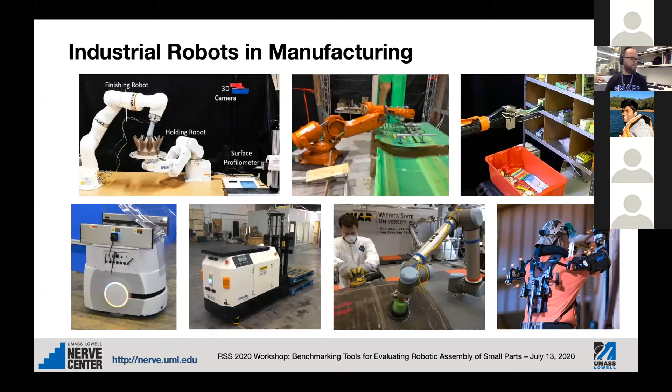Regardless of the type of industrial robot used in manufacturing, there comes down to some core metrics that people looking to adopt and deploy systems are really looking for. Those are metrics related to performance, efficiency, and productivity. There's also other metrics important for these systems related to how much they cost and their return on investment, but we're going to be focusing strictly on performance evaluation for this talk.

There's a lot of different metrics that fall into each of these categories, where for the performance of a system, you may need to match a certain spec for certain accuracy measurements of a robot arm, or a certain quality of grinding you need to reach for a certain application.

For efficiency, it's all related to the amount of time it takes for things to be redeployed for different tasks, or ratios of time spent in one part of the process versus another. Those two combined can be used towards productivity measures - ultimately throughput rates, defect rates, things that are going to affect your output.

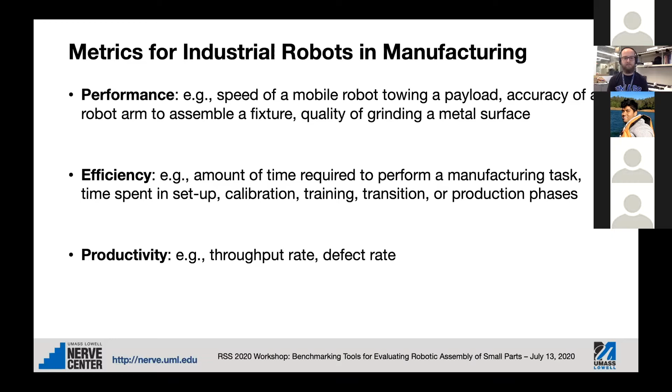But for the type of test and evaluation methods that exist right now, some of those metrics are addressed, some not as much, but we want to step through what each of these different efforts are and see what's available.

We're going to be talking about mobile robot navigation, the different benchmarks for robotic grasping and manipulation, and those related to HRI and exoskeletons. Not really talking about safety, because that is another set of standards or evaluations that can be performed that are outside the scope of what this group might be interested in.

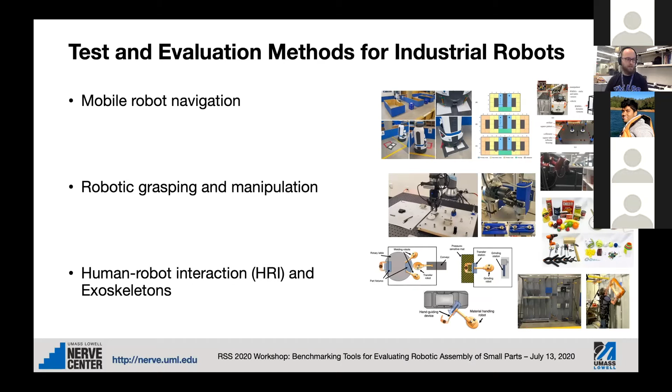Starting with industrial mobile robot evaluation, and I'm not going to be covering every effort out there, just those that appear to be the most salient in the research space. The ASTM F45 committee has been formed for about 4 or 5 years at this point, and develops different standardized test methods for evaluating mobile robots or AGVs, meaning those that are a little more automatic or automated into those that are more autonomous.

There's a couple different subcommittees that work on different types of standards in this space, such as those on the screen for environmental effects, docking and navigation, object detection and protection, and communication and integration.

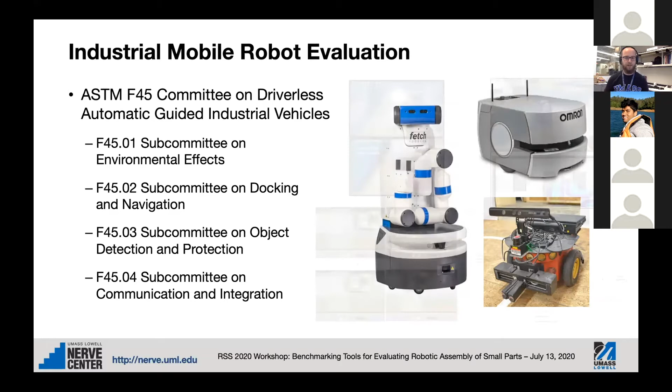Each of these test methods or different standards will take a slightly different form, where some of them are in the form of what we call a practice, meaning something that is not necessarily a test method unto itself, but can be used for recording salient features and using them in a test method. For example, on the top left here, this is part of a standard for recording the environmental conditions of a test.

In this screenshot, there's a very bright light shining at a robot, which may interfere with its sensors that it's using to navigate. So we want to record the different types of environmental conditions that exist.

As part of our docking and navigation testing, we have a very simple navigation apparatus, where the robot is moving through a space, moving from point A to point B. Maybe there are different obstacles involved, but ultimately going from one point to another.

In F4503, we focus on the description and testing of those different types of obstacles. This is a test being performed where a small black cylinder object is placed in front of the robot that is intended to trigger its safety sensors, something that adheres to another standard.

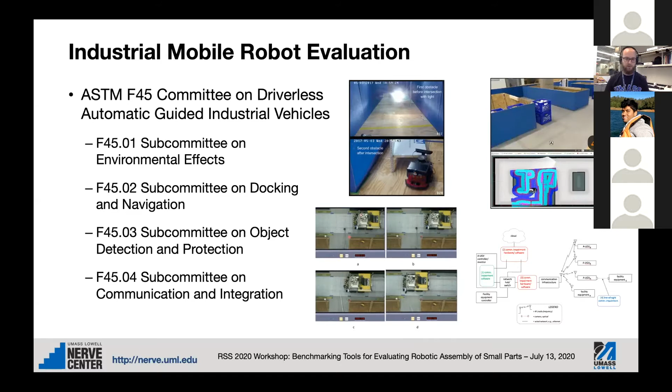And then in F4504, where we focus on communication and integration, there is a standard practice for interfering with the types of communication that the system might encounter.

Now, what's crucial to note about the way all these different standards are designed is even though they each cover different parts of the space, they are designed to work together. We've been colloquially calling them building blocks.

And the way this would work is in our navigation test method, we might define an area where the robot is going to navigate through, let's say this T-shaped intersection here where it's moving from point A to point B. Our main metrics here are the amount of time it takes, the dimensions of the space, and whether it's successful or not - kind of basic measures.

If we start to apply some of our environmental condition standards on top of this, we can record where there are light sources that may interfere with the robot's sensors, whether we put them in as a challenge or they exist naturally in the environment. We want to make sure we characterize them.

Using our obstacle standards, we now define where there are obstacles in the environment, which may influence the path the robot is able to take to get to point B, or completely limit its path to get to point B. And maybe there are induced dropout periods where the Wi-Fi is understood to not work very well, or artificially induced. Because these are formulated this way, we can start to build up complexity into the types of testing we want to perform.

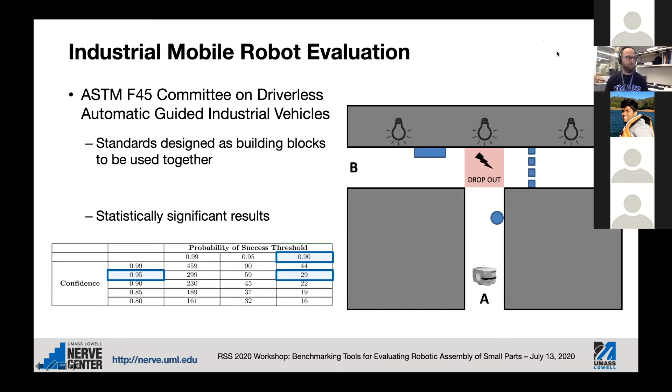Now, moving to manipulation, there's not necessarily a fully realized standards committee similar to, say, ASTM just yet. But there is the IEEE Robotic Hand Grasping and Manipulation Group, which some of our organizers are very active in - a new IEEE standards activity just getting spun up, where hopefully some of our standard metrics and test methods will be more widely proliferated throughout the industry.

And then, while not strictly focused on manipulation, the ASTM E57 Committee on 3D Imaging Systems has been reinvigorated into focusing on perception, more specifically tuned to robot assembly applications.

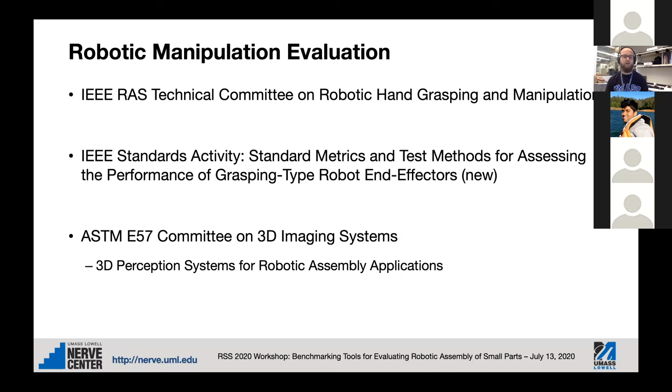So it has a lot of overlap in the way that we would evaluate some of those manipulators. Now, on the side of robot manipulation, there's a very wide gamut of the types of tests that have been defined, or at least those used out in the research space. Down from end effector characterization, these are two artifacts out of NIST for evaluating grasp and finger strength.

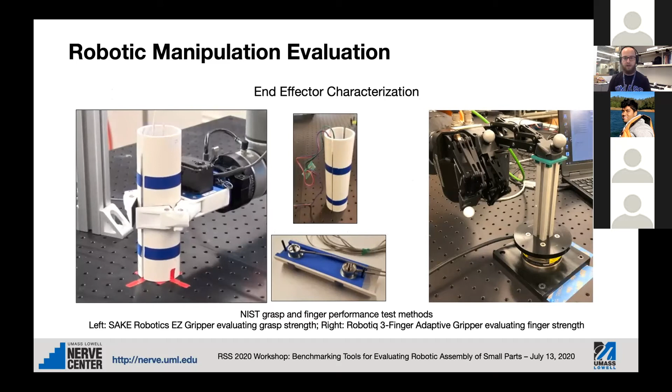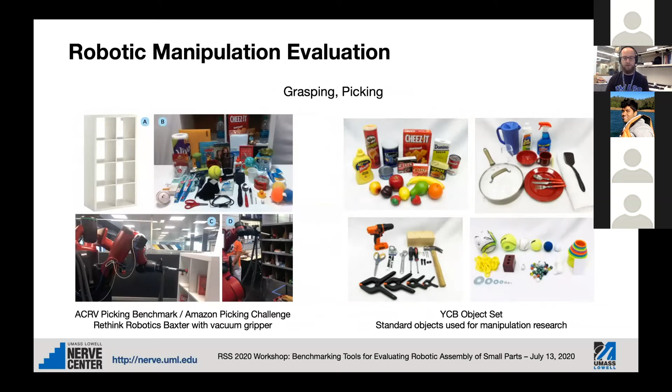Kind of very core elemental capabilities of different end effectors. Then moving further along the complexity scale is test methods for grasping or picking. On the bottom left here is the ACRV picking benchmark, which is basically a standardized version of what's been used in the Amazon picking challenge, where a series of standardized objects are picked out of a shelf. Some of those objects may be the YCB object set, another very common set of standard objects used for manipulation research.

And then furthest up into at least the existing complexity level for test and evaluation resources are the assembly task boards, those that are largely the subject of today's workshop. Kenny touched on the different variations that exist with each of these boards.

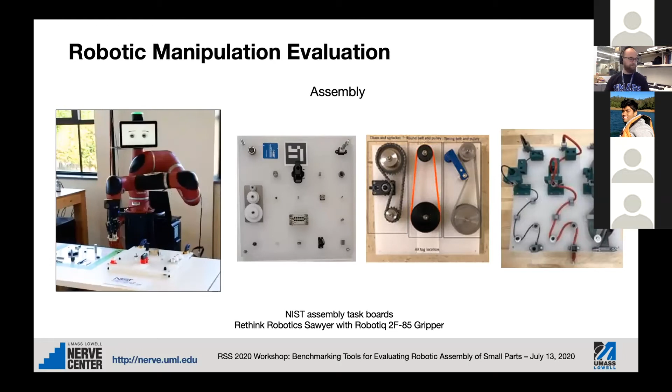Now, given that wide array that are really focused on grasping and assembly and manipulation, some of them we can actually start to use to look at the perception and adaptation capabilities of robotic manipulators. For example, when these assembly task boards have been used in competitions like Kenny was mentioning, there are some mechanisms used to try to force the ability for perception and adaptation capabilities.

For example, training the teams on one board, having one board that's made available to them ahead of time, and deploying a different board at the competition, where the same tasks are used, but they're laid out a little differently.

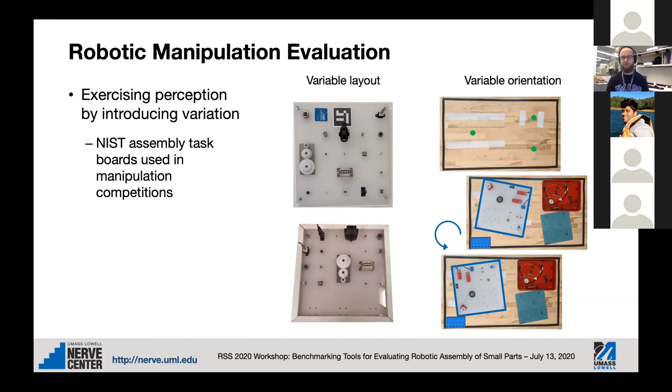Now, while we're starting to see these go out into the more standardized and industry space, it's more so the elemental grasping artifacts that are starting to be used in some ISO standards for evaluating grippers. And hopefully this new IEEE standards activity will take some more of our task-based manipulation test methods and start adopting them and proliferating them more as a standard.

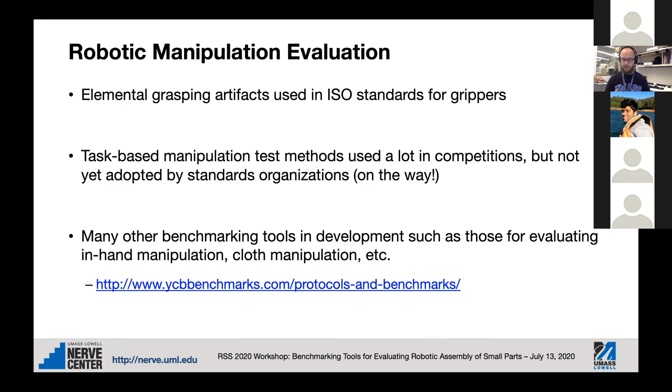But on top of this, there's a lot of other benchmarking tools in development for in-hand manipulation, cloth manipulation. It's a very active research area at the moment, and I think that's because of the versatility of those types of systems. It can get a lot of activity around it.

Now, lastly, I'm just going to briefly go over some of the resources available for HRI evaluation. HRI evaluation in manufacturing spaces can span many different tools and measures, so I'm not going to spend too much time on them. I'm going to focus more on the exoskeleton side. But I did want to leave, if anyone is interested in learning more about HRI evaluation in manufacturing environments, a great paper that was just recently published that catalogs a lot of the different metrics and measures for HRI in manufacturing spaces.

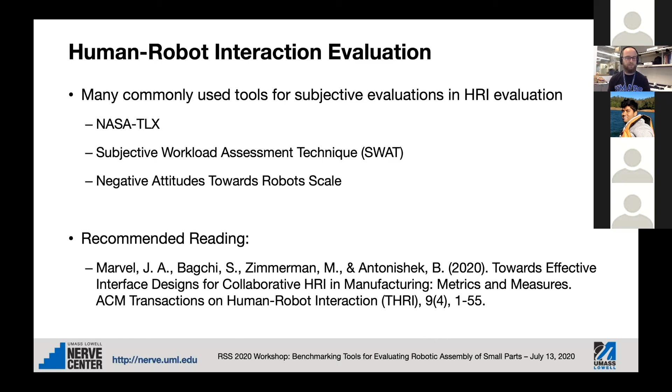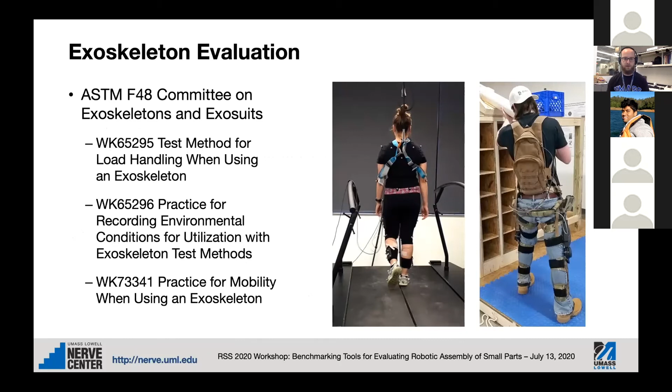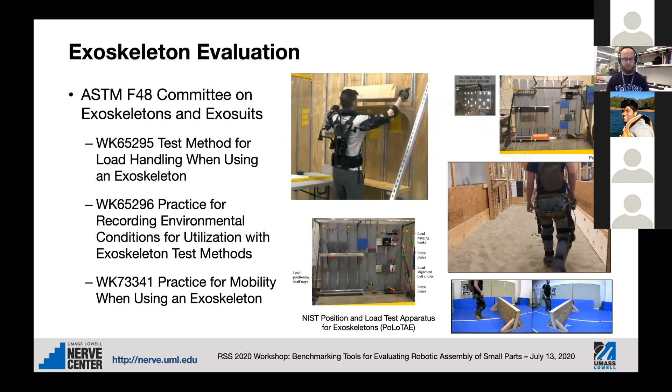Because on the exoskeleton side, it's similar to F48, where we have a standards committee focused on testing and evaluation of exoskeletons and exosuits. Their test methods will function somewhat similarly, where maybe we have a test method for load handling happening in some standard apparatus, a practice for recording the different environmental conditions under which that test is performed, and a practice for defining certain mobility aspects of those types of test environments.

And they're leaning towards that same kind of structure, where they're put together like building blocks, where you can start to combine different elements of different standards to make more complex and comprehensive testing.

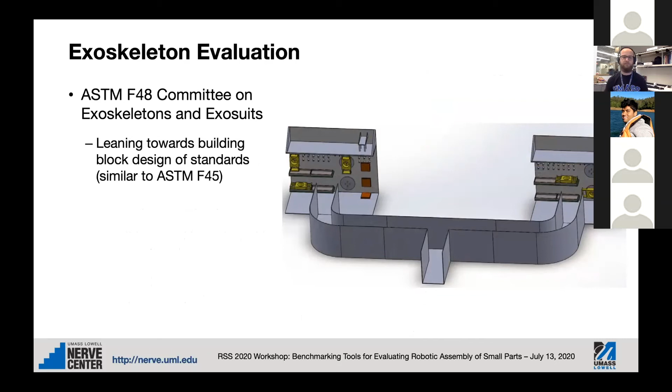So looking at this at a larger view, there are various different test method domains, and some are more mature, some are living more in the research space. Some of this comes down to either the maturity of the technology or how broad or narrow some of these research areas are.

In mobile robot navigation, ultimately there's probably a limited number of unique tasks that a mobile robot system on its own can perform. They all really come down to moving from point A to point B, maybe with more accuracy, maybe moving within obstructions, but it has a fairly narrow space in that regard. So the fact that they are standardized and proliferated into industry makes sense. It's easier to build some consensus.

On robotic manipulation, there's a very wide span of different ways you can evaluate those types of systems, from our lowest tier of end effector characterization all the way up to perception-based assembly. But there is a lot of commonality in the way these testings are performed due to the availability of different benchmarking resources.

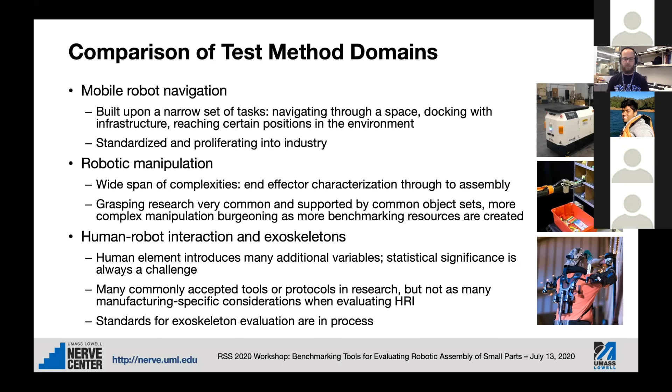Very similarly for HRI, it exists somewhere in the middle of the previous two, where there's still challenges associated with getting statistical significance in our data, because anything that involves humans inherently becomes a much higher dimensional problem. While there are a lot of accepted tools, there aren't as many manufacturing-specific standardized considerations for evaluating HRI. And there's the exoskeleton community that I think is gleaning some of the lessons learned from the other spaces.

So it leaves this series of questions: Are the current test methods that we have, or that are currently being developed, sufficient? Can we go back to those core metrics that are relevant for manufacturing? And can we actually derive some of those measures from those test methods? Certainly you can evaluate grasping, you can evaluate assembly, but there's not really a standardized way to look at more manufacturing-focused tasks like grinding, polishing, welding, composite layup, without doing highly specific experiments.

Efficiency certainly is in there. Timing is a core metric for most of these test methods. And productivity is something that could be derived given that you test in a way that looks at an entire suite of repetitions as opposed to single ones. But more importantly, are we actually evaluating the advantages of using robots in manufacturing? They are made to be robust, adaptable, generalizable, improving and learning over time. I think to date there hasn't been as much focus in those areas, but it's encouraging to know that there are some new efforts starting to look at these aspects.

So ultimately, there is more manufacturing test method focus that is needed. I think the assembly task board that we're largely talking about today is starting to lean towards that direction. But there are certainly other areas where we can take our various robot capabilities and elevate them into what is needed for them to be a little more manufacturing focused.

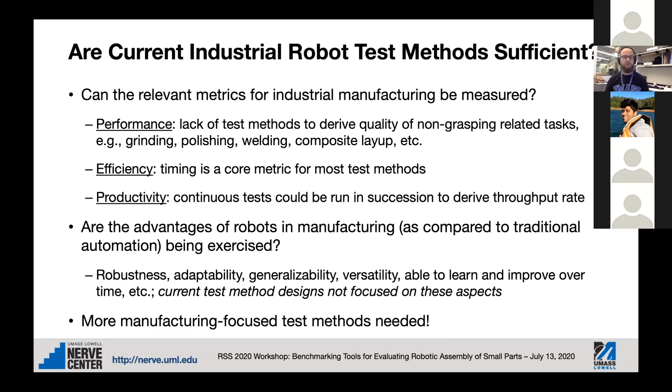And that is my talk. Thank you very much.

Anybody have any questions? Yeah, thanks for the talk, Adam.

I had a question. So you were focusing on, rightfully so, modularity in assembling these tests together. Is there a standard way of dealing with or expressing how one task might slow down, impede, or hinder the next one in line?

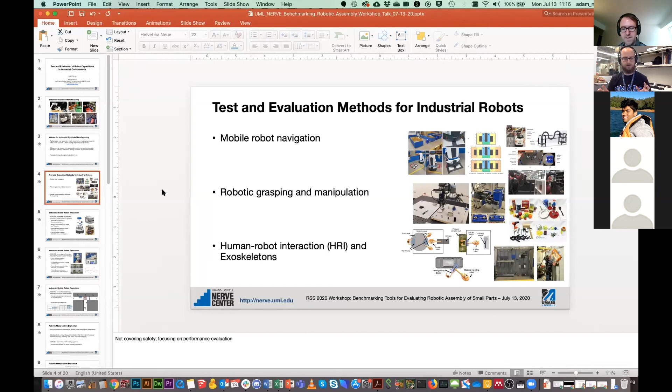I think that's a good way to think about it. It's certainly in terms of thinking of it more as a process, where right now a lot of our evaluations are largely for single tasks, single capabilities, not looking at the performance of tasks in tandem, or doing things more as a process or workflow. So I think some of that is not really being considered just yet, but given that we are formulating our tests to function like building blocks, I think that is one avenue we can start to explore.